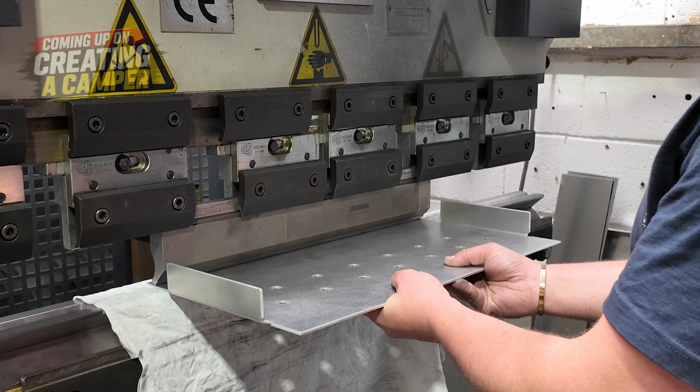How was it? Tell me. Any good? No.

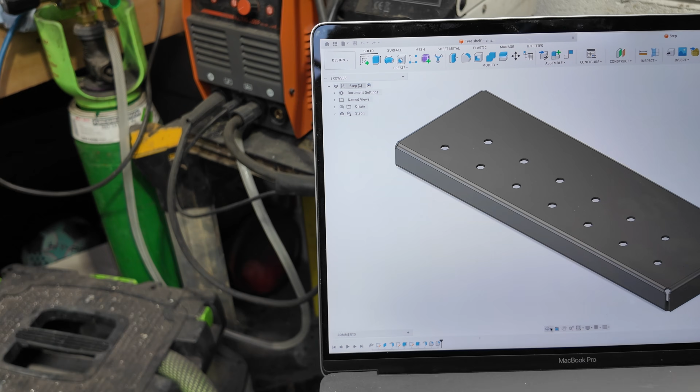Now excuse the mess. These are our mock-up steps and they work pretty well. But what we did, we went on to our Autodesk Fusion and created a 3D version of said steps, and we've had them laser cut.

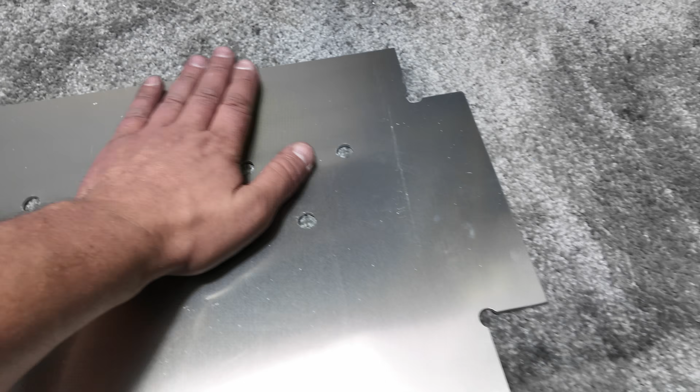That's the flat product. So we're just about to clean them up and then we will get them folded on the old Pressatron, or press brake in simple terms.

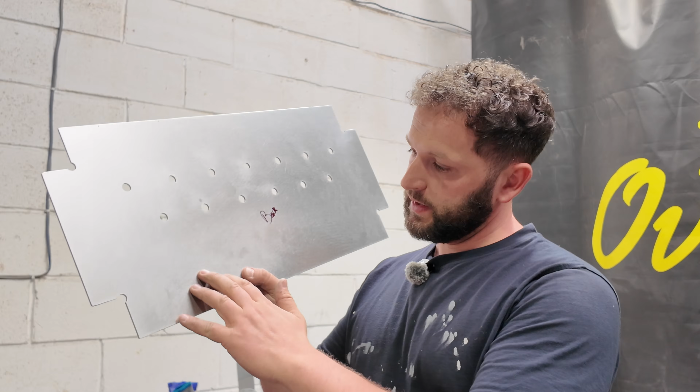Right, that's them all cleaned up. So, this is the flat pattern, and this is what we want them to look like, like so. So what we're going to do, we've already created a flat pattern, so we'll activate that.

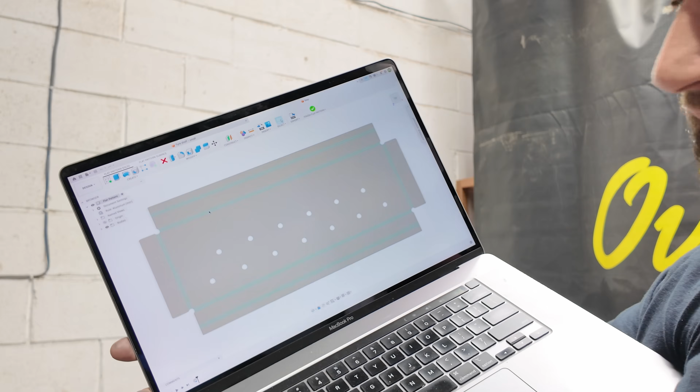And there you are. That's basically what we've got down there, but as you can see, we've got all those fold lines on. So what we can do is measure from the first edge to the center of our fold line, and we've got 17.393. So we'll call it 17.39.

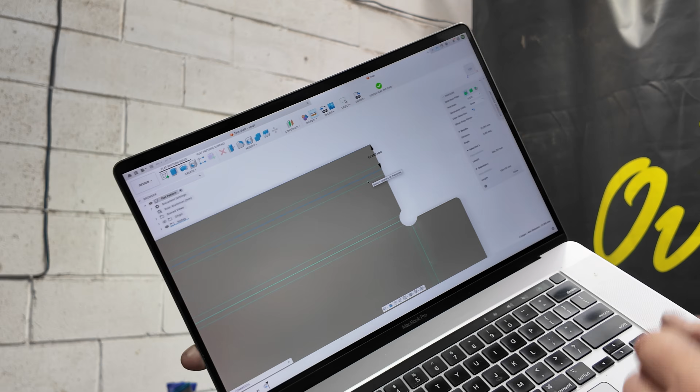So what we're going to do is input that into the press brake, and then we'll get them folded and make a step.

Right, I got that wrong actually. What we need to do first is the shorter sides. You can get it quite wrong when you're folding, because if you fold something first that you shouldn't have, the next thing won't work. So you've got to be really careful.

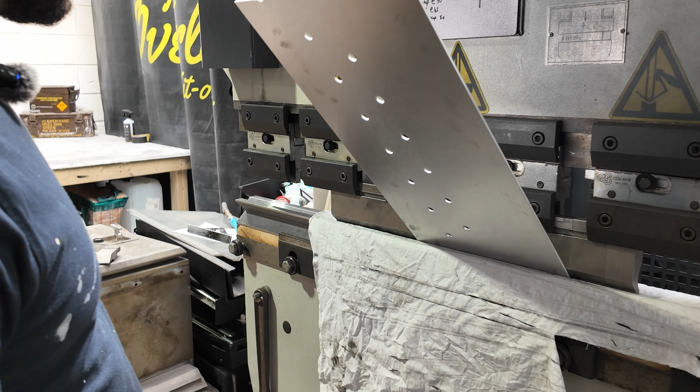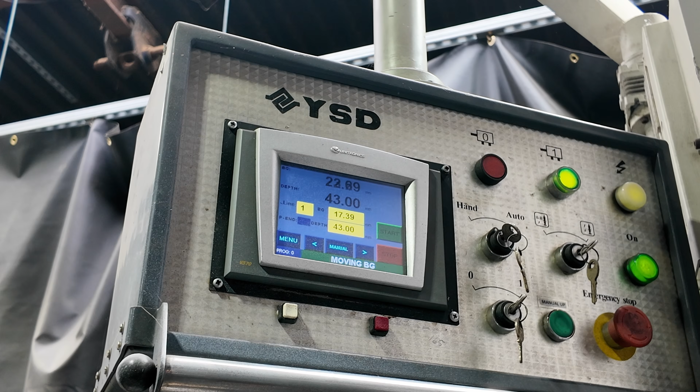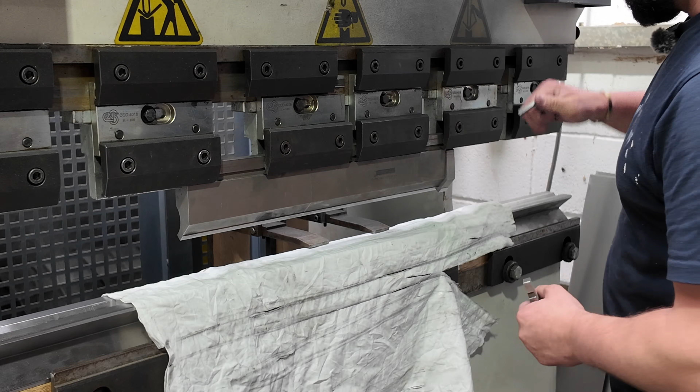Right, what we've got here is tooling for the press brake, little fingers almost. And what we've got to do, when folding stuff like this, for the next fold, is make sure the tooling fits in between these two folds here. So that's what I'm doing now, just lining that up and adding more in to make up that length.

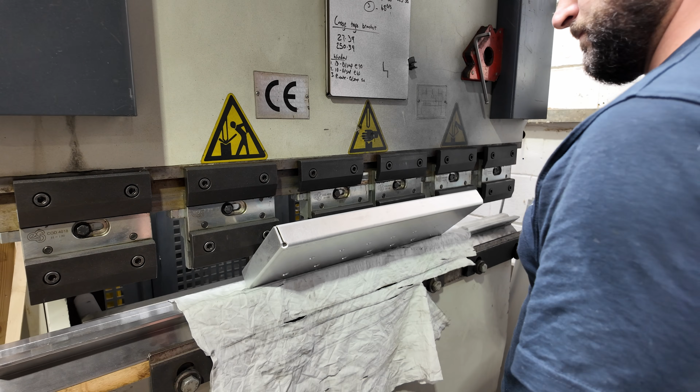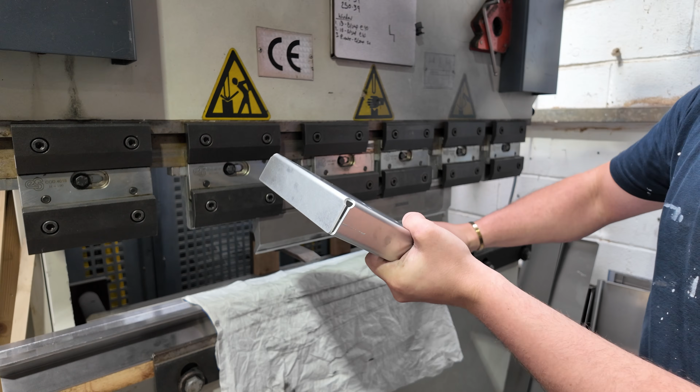Right, well look at that, that is the step. Now we've got a little trick for these which we're going to show you in a minute. Now we've got the steps all folded, looking pretty cool.

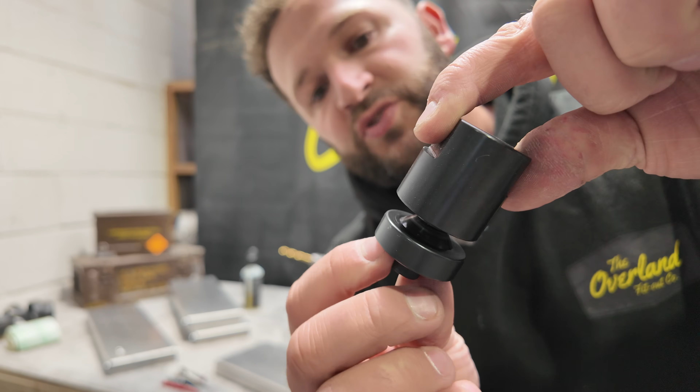We've got these holes. Now these holes are for this, if you can see it. Now this is a punch and die kit flaring tool, and what it does is, you put one side up from underneath, put this on top, and as you tighten it up, it punches through the step and creates a nice flare.

So we'll show you that now. One thing I've done, for some reason, I've made the holes 1mm too small. So I've had to go and buy a 13mm drill bit, because it's the one that we didn't have. So let's drill them out first.

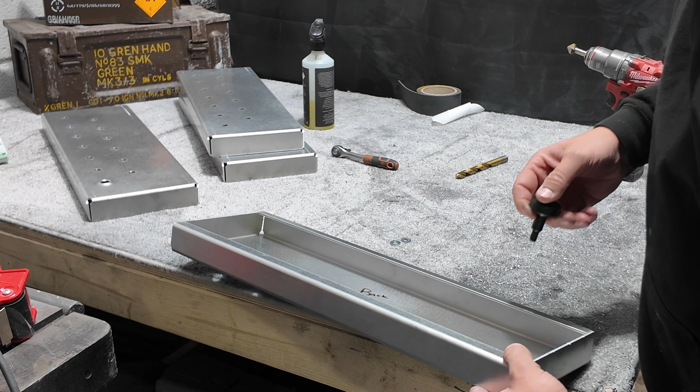Right, so what we do, put the protrusion bit through the bottom, put that side on there, then we get this little ratchet. Can use a drill as well, I believe. Tighten that up, you can see it.

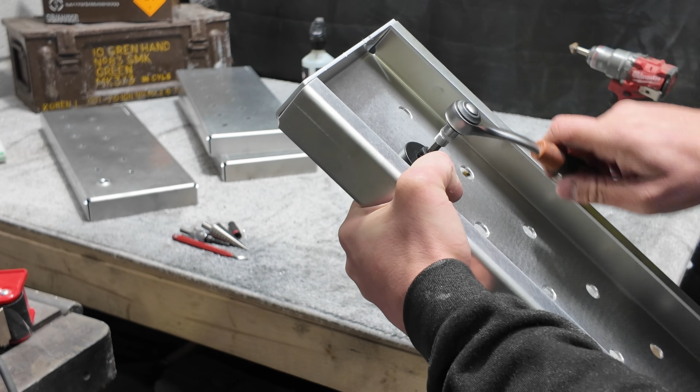Tight as it'll go. Then take it off. And we should have a nicely flared piece.

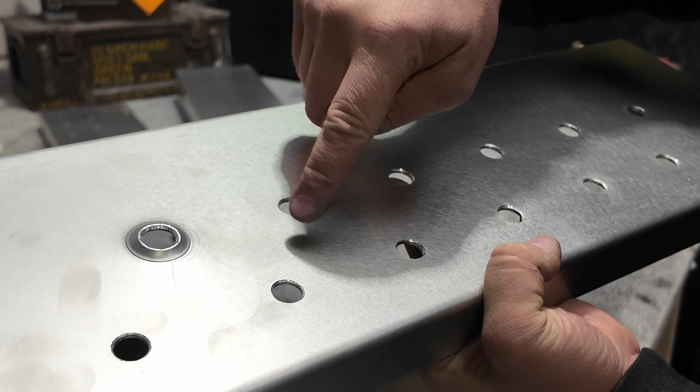Wowzers, look at that. That's it. So obviously, a series of these, once we put them along the step, that's going to create a non-slip step, hopefully.

Right, we've only got 51 to go. Maybe we can use this in the press.

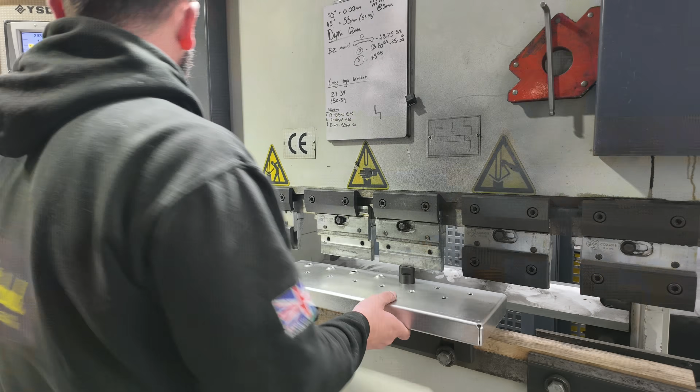Right, what do we reckon? There we are, look, 4 steps, all done. So, let's get the legs cut and get them bolted together.

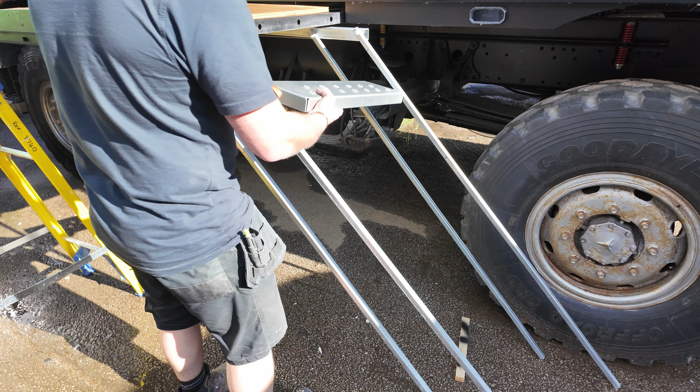Right, so for that to work, yeah, that needs to be closer together. I need to move that.

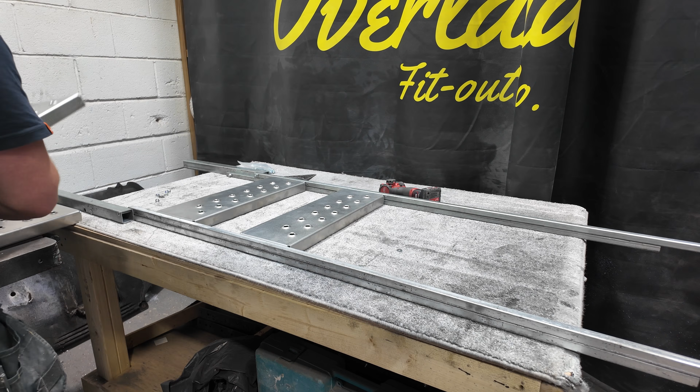Right, got it. Right, so I'm just kind of mocking this up as I go along, really, trying to figure out what goes where, because like I said, we've changed a few things.

What's that measure? 280.

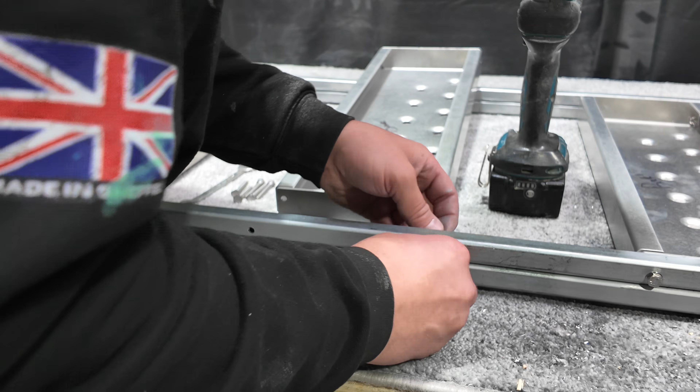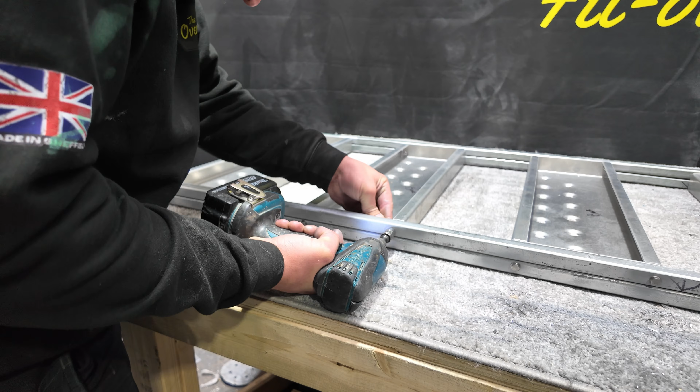Right, let's give them a test.

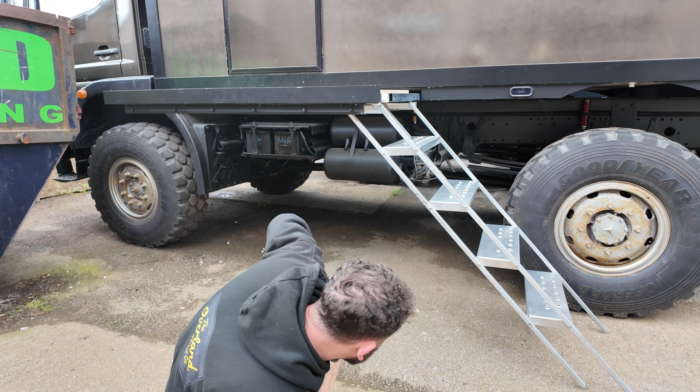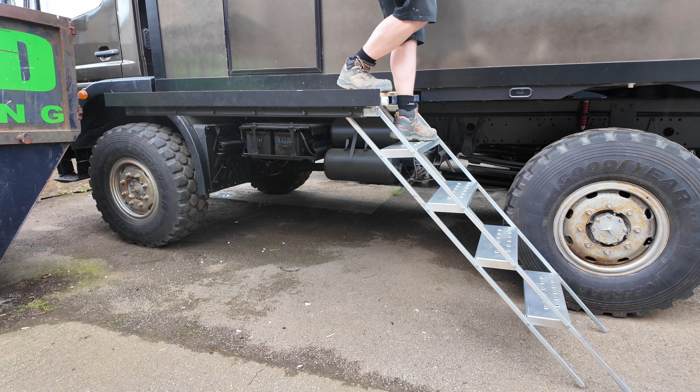What do we reckon? Nice angle. Bit further out.

John, come here. Up here, look. Come on then, good boy. Go on then. Come on. Alright guys, I think that was a success.

Put them away. Lift it up. Slide her in. May put some stops on the other side. But then what we've got, I'll show you under here.

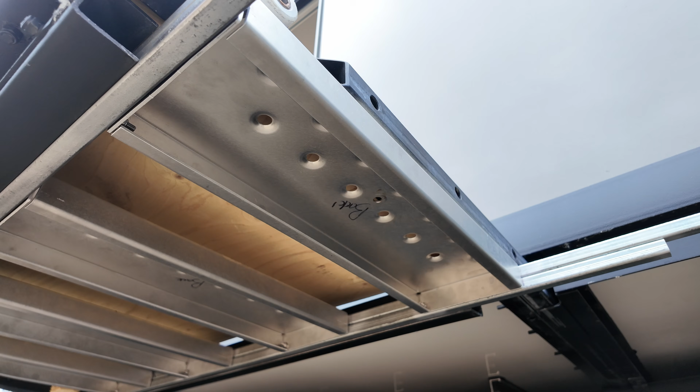Many months ago I just drilled a hole for it in the step, but many months ago we put a riv nut up in here. So if we use this through that hole and up there like that, beautiful.

And that is it. I think what we're going to do is powder coat the side rails, that and that. I think we'll powder coat them black, leave the steps aluminium, and then I guess when the steps are out, if the rails are black, the steps will almost look like they're floating.

Still need to put some locks on this to stop it from coming out whilst we're moving. But I think that is pretty cool.

Right, that's it, stairs are on. And whilst we're on with a bit of fabricating, I've got an idea for inside here, in the last unit that we've got to do.

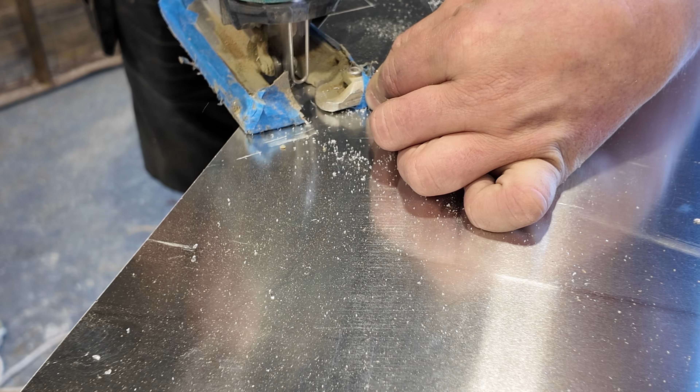Right, we've got those cut roughly to shape. So what we'll do is take them next door, clean them up and fold them.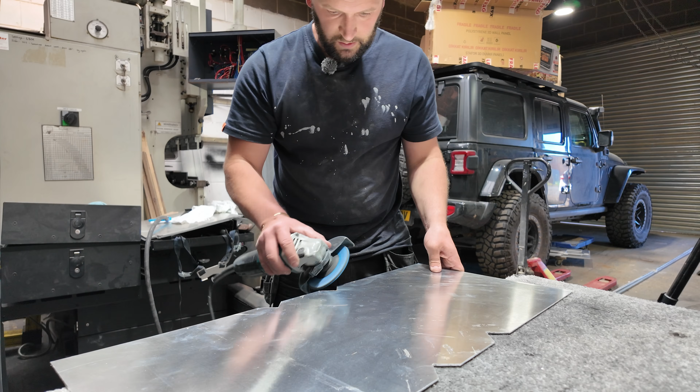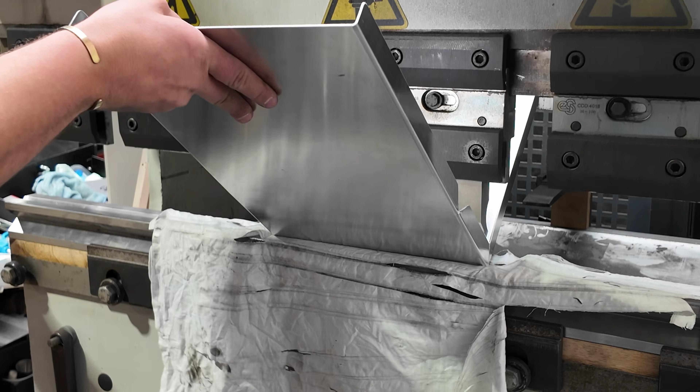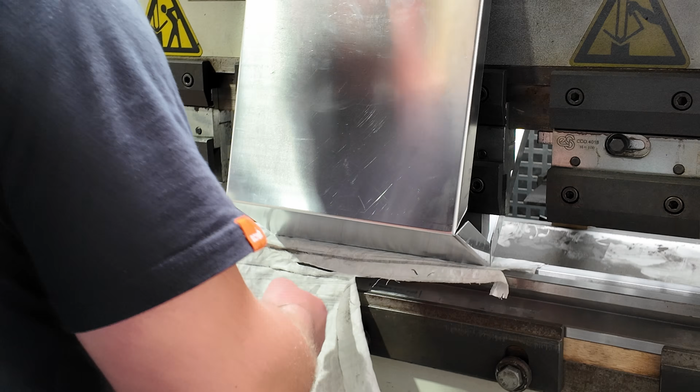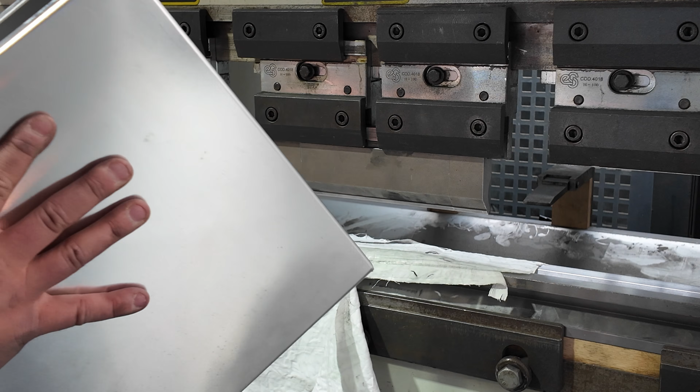Now I just want to say, for what it is, this isn't the correct way to do it, but it is just a bin unit. As you can see, look, it bent out past 90 degrees, but it's only 2mm thick, so we can just push it back in, look.